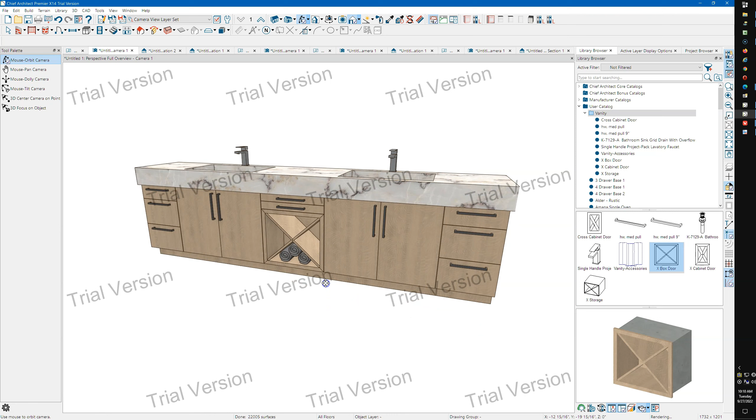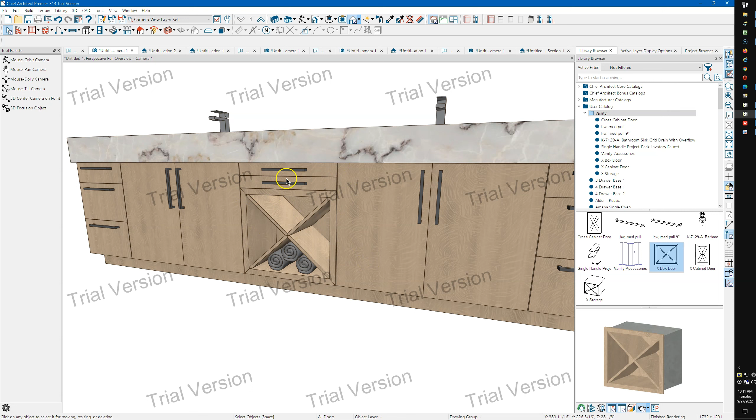One of them is this X insert piece, this is the one Chief gave us, and it's basically just an insert - you'd create a blank area in the cabinet and stick this in there. What I did was make a door - I made my own symbol and made it a door symbol, because I wanted a frame around it. I just wanted it to look a little different. So I built it and put this frame around it, and when you apply it as a door panel, it comes out flush with the other doors and looks built in instead of something added on.

I made all these pieces - you can see this is just a standard view with lines on top. I made all these pieces into individual faces because I wanted to apply materials to the individual faces instead of letting Chief wrap the material. I made over here 5 different versions of this quarter sawn white oak - some of them on an angle, some of them offset, just experimenting with things.

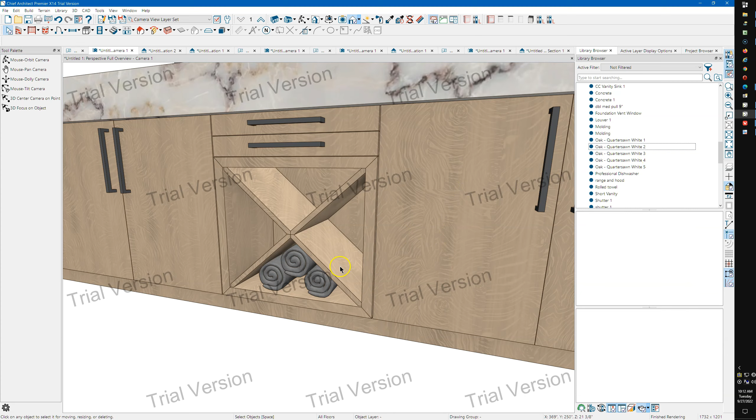I also made my own door symbol for these doors. Let's see, oh, here's the one Chief did - I'll just stick it on there, so it's a little different. Again, mine are all individual faces, so you can apply grain to wood grain stuff however you want it.

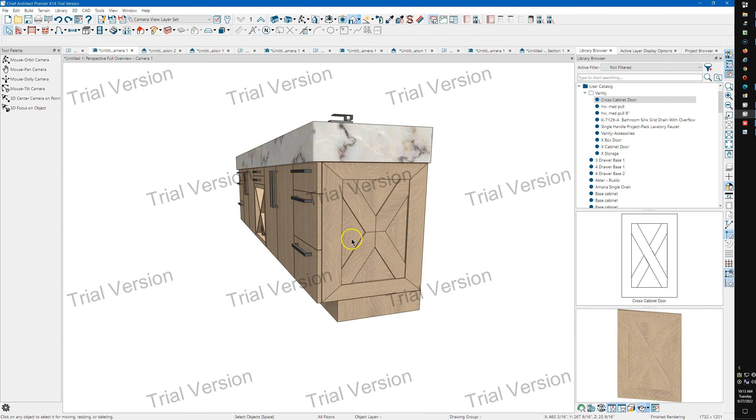This side is applied as a panel, and the challenge was to do an inset one, so this end is inset. I also changed the hardware - I thought the ones Chief gave us were a little too long.

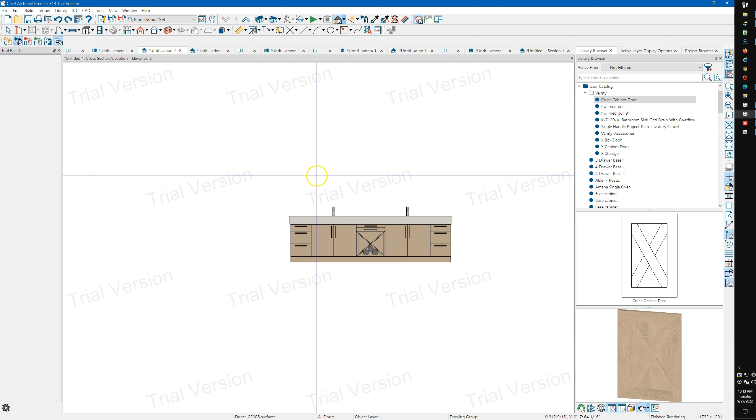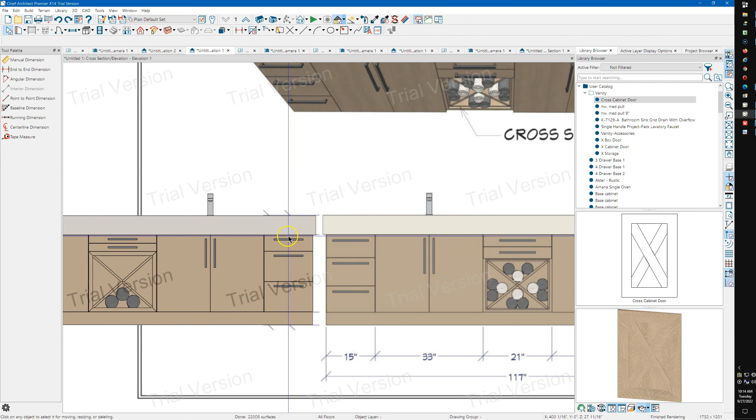So here's my vanity on the left, and the Chief supplied visualization here on the right. I made these handles smaller, and I didn't copy - their drawers are different sizes. I'm not sure how this happens, but the one that came from Chief has 3 different drawer head sizes, which doesn't make any sense to me.

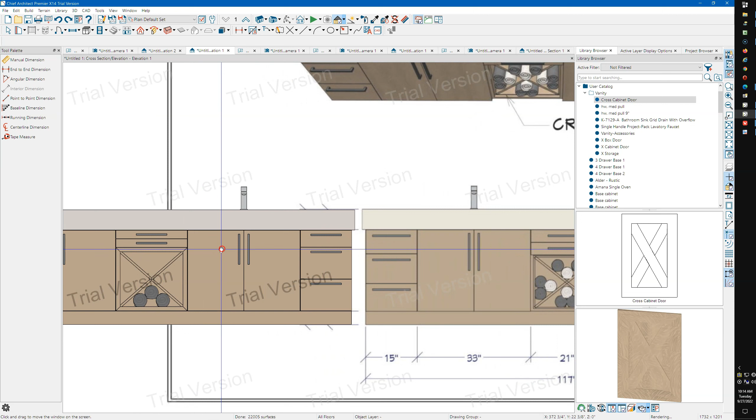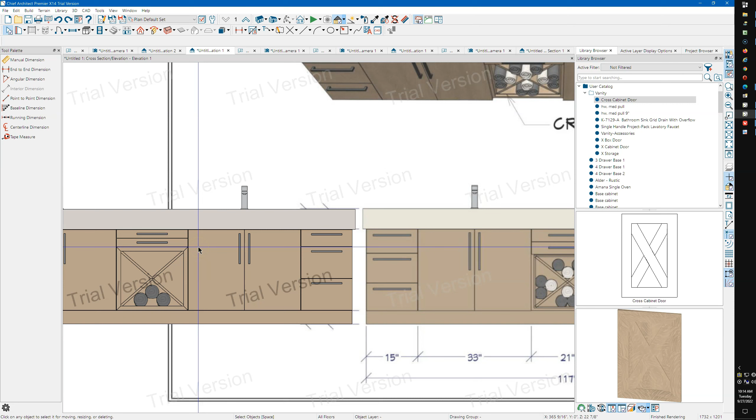So I worked and learned how frustrating it is to create drawer heads that are the same size. I learned that because we can't specify things down to the 32nd, it's hard to get true alignment when you've got a split, like two smaller drawer heads you want to align across the bottom with the bottom of this. You can't do it because of the limitations of the software, which is frustrating.

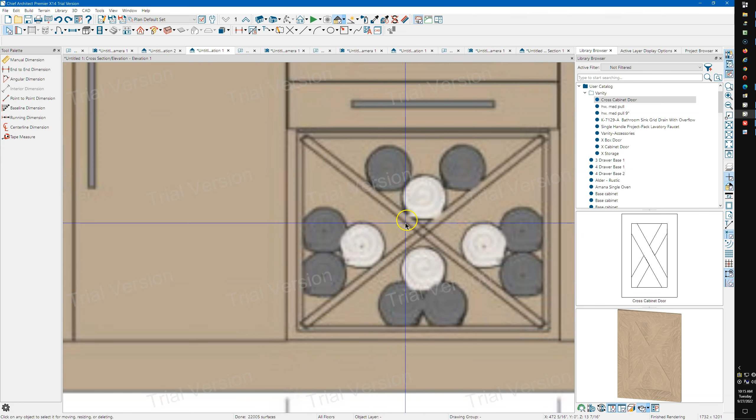You'll see over here, if you notice, this X thing that Chief gave us - they built it kind of sloppy. They just drew some cross pieces in here, and they overlap into the sides and cross in the middle. They don't look very good. You can see it over here - theirs is 20 inches deep, it's full depth.

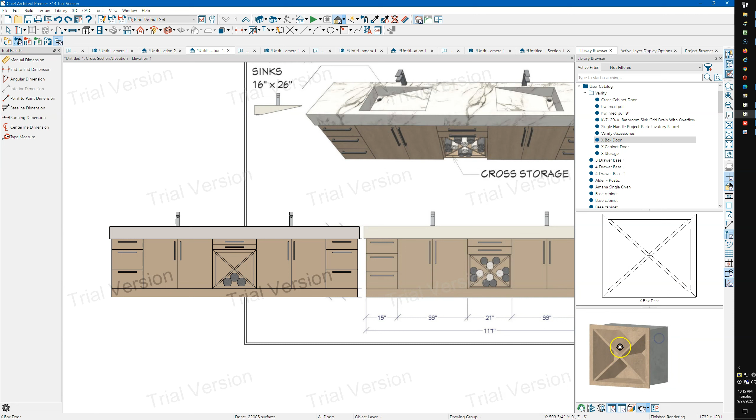And the one that I did is, I think, 13 inches deep. I don't think you need 20 inches to stick rolled up towels in.

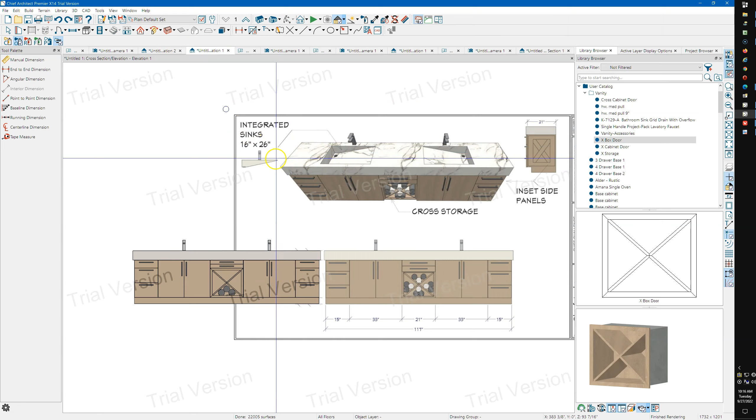Anyway, I'm going to show you how I built the sinks, because I think that's the only unique thing I did. The Chief sinks are spec'd right here, and that doesn't look very realistic to me. I don't know why you'd want such a steep ramp here in the bottom of this sink - that doesn't give you much of a sink to work in.

So I made mine like this - there's enough slope to get a good drain, but you still got plenty of room down on this side to work. I did not put the drains in - that's something I could have done, I just didn't do it.

And I noticed that all of a sudden there's a line here that didn't show up previously in this sink - there's not one over here. These sinks are just, I think I placed this one and then copied and reflected it to get this one, so it seems like they should be the same.

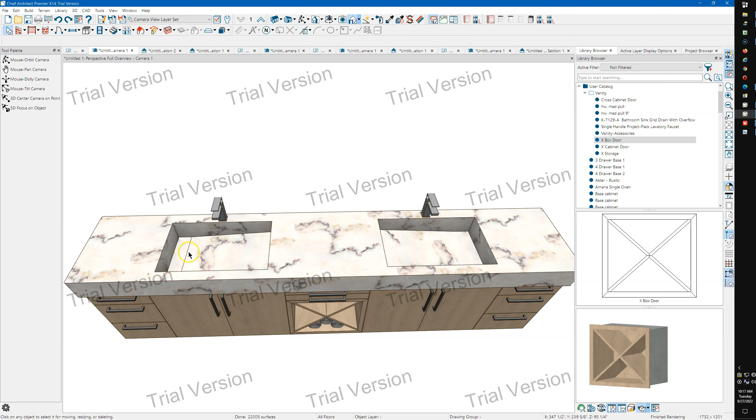But anyway, I'm going to go over here to the sinks. I'm going to come up here and choose a face, and I'm just going to draw a face. Then let's make it, I think it's 5 inches - I'll make it 26. So there's the side. I'm going to put a break right there and drag this up a little bit.

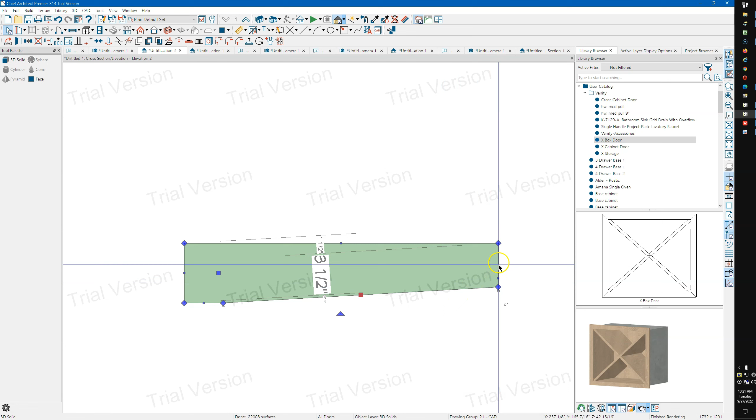Of course you can be exact with that using dimensions or whatnot, I'm just doing this for a demo. Let's go back over here to plan, and there's the face I just did, so I'm going to select it, copy it, and move it 16 inches. I'm not sure if that's the correct thing, but it's good enough. Let's go to our 3D.

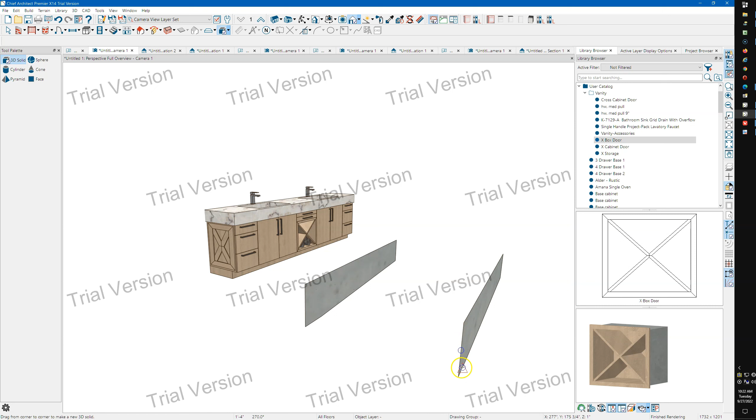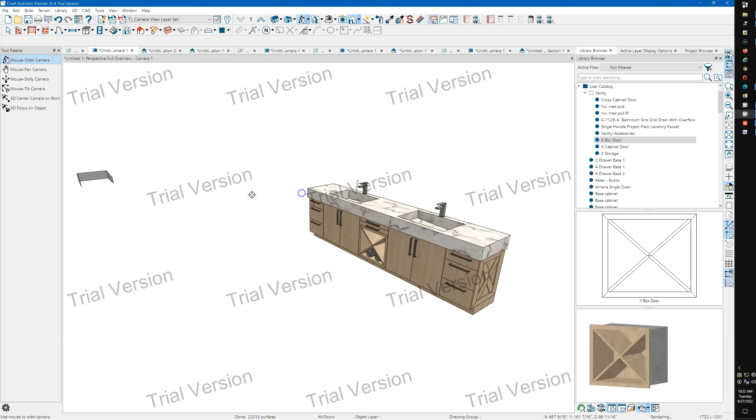And there's my two parts there. So I'm going to come over here like this - I'm going to pick a face, pick up that point. I need to pick a face. Pick up that, come over here, come down to there, come over to here, back up to there, and then I will spin around. Same thing here - get that, over to there, down to there, here, back up to here.

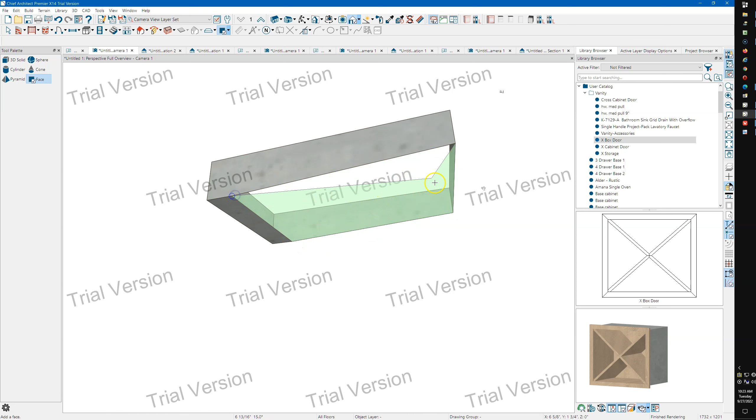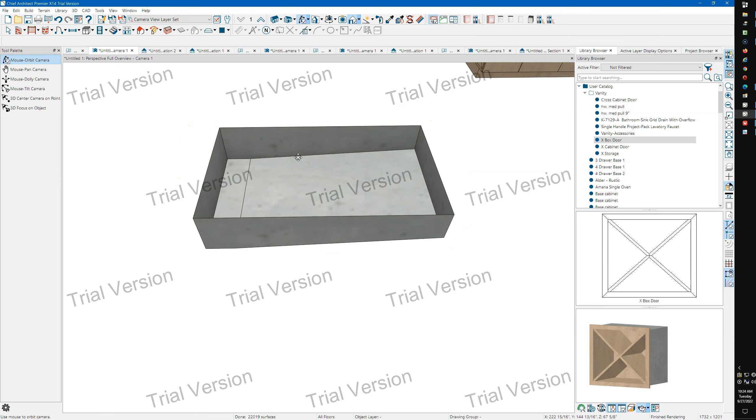So there's my sink. Now, of course, I wasn't real particular about measurements, but I can just select this and make it into a fixture symbol - and that's what I did for these sinks.

The only issue I have is you can see, if you look at this back wall, how the material changes. But if it's static, it's okay. And now you can see that line that was here before is gone - I don't know what causes that to come and go.

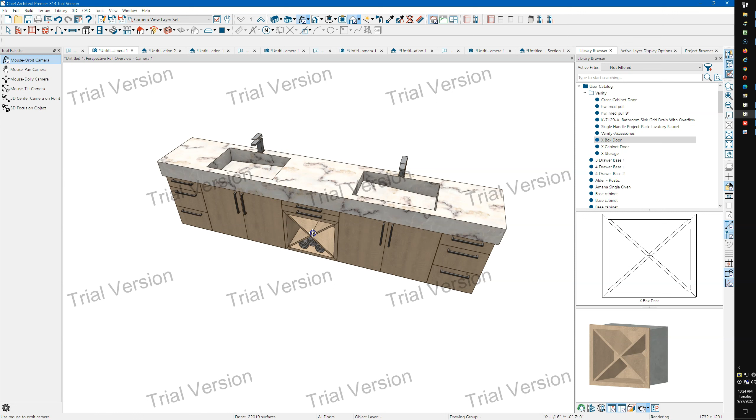Anyway, what I wanted to show was how to do a simple sink like that - of course these are all square cornered, there's no curves or anything, so just using faces is pretty simple. I wanted to go over the sinks and using a door to place this X thing, which works pretty easily.